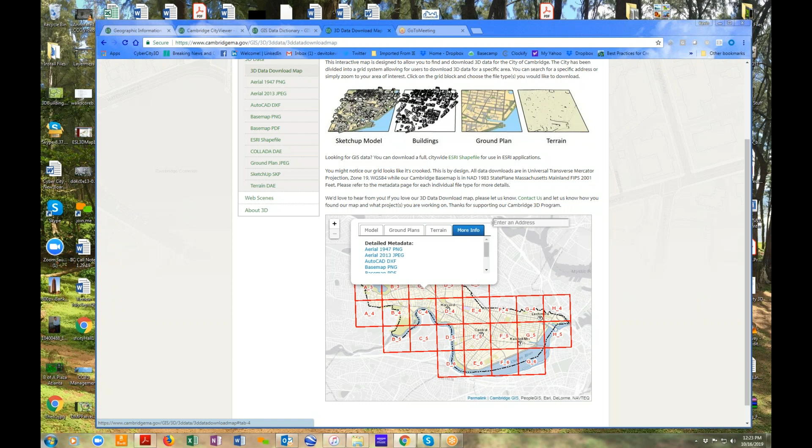I've got one correction on what Jeff said, and that is the ground plans are in JPEG or PDF or DXF, and the buildings are available as Collada. We're thinking about making the buildings available individually as KMZ files too. But yeah, that's about it - that's all I have to add.

Okay, thanks Paul. Sure, thanks Paul.

So just to let you know, Paul, Mark Thomas here. I've used the download tool and seen it. It's great, it was one of the better ones I've seen out there, definitely. Thank you.

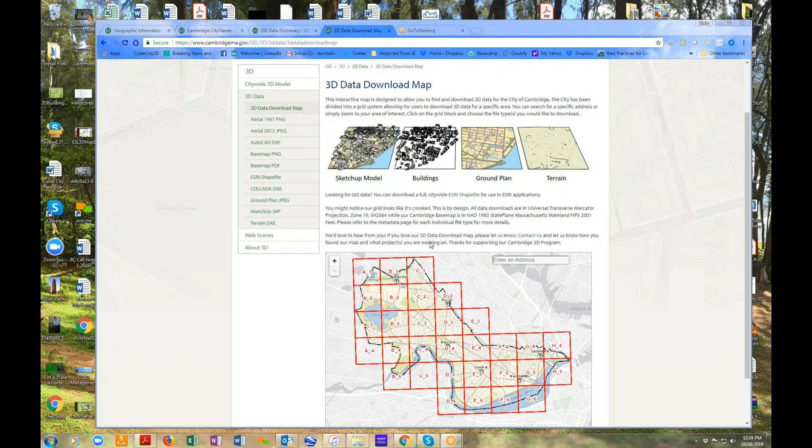So we're one step beyond the download tools, to try to get the architects and anybody else, the developer, to submit plans back to the city. That's part of our digital submission requirement. It's kind of out of what you're doing here, but that's the bigger picture: not only do we want people to be able to pull data down, we want to be able to get data back and bring them in.

Kevin is creating buildings and doing an update now of our buildings. We don't always have the data to create the building, so as a nice placeholder we get these as-builts. That's nothing new to the city, which also has a digital submission requirement for any infrastructure, water, stormwater, sewer lines, and we also have a requirement for plans. Really, they just get them in PDF format in our inspectional services. So anyway, we want to be able to exchange data back and forth.

One of the only downsides, I'd say, of the download link - not a bad thing - but before, when people were requesting data, we got a really good feel of who was asking for it. They'd have to call me, which is more work, so I'm not looking for more work, but it was nice knowing if somebody sent me an email and I could ask them a bit about what they're doing. So that's lost, because people just download it.

We look online and just see how much people are downloading. Once in a while they'll ask a question, but anyway, we'd love to have the back and forth with some of the developers. I think working with our planning department and the bigger architects we see time and time again, we'll start to open up some channels with them and talk about exchanging data and learn a bit more.

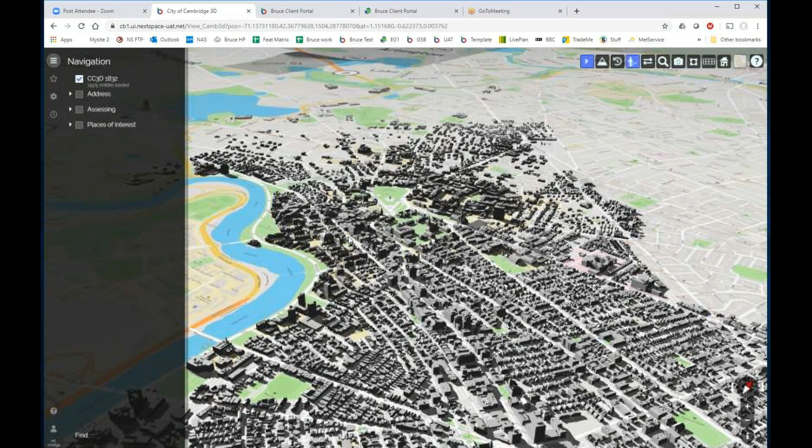So we send them around, we see them. I've also found in my work with Boston, which is a very similar system, that we've had some outreach with the Boston Society of Architects, and they've revealed that a lot of architecture firms have downloaded the entire model and are maintaining their own version in parallel. So, notification of updates is something they're interested in, as well as having individual buildings they can plug in instead of having to get large tiles to update when just one or two buildings have changed.

Well, that's interesting.

That's a conversation we've been having with a number of architects, around having this as a resource that they can collate across people within an office, and even across multiple offices. So the concept of federating and sharing is interesting. Do you want to contribute your data to the greater good, or do you want to keep it private? Some of those options are interesting. We can do it both ways, but it's an interesting conversation.

I don't have much more to say about the download tool, except that it's something that we know. We're looking forward to the data update coming from Kevin and incorporating that in. What we really want to do is have the data updated as much as we update our 2D data. For our 2D building footprints, we try to get them in as soon as we see construction happen. That can't happen with 3D, but we'd like to try to get some stuff in here.

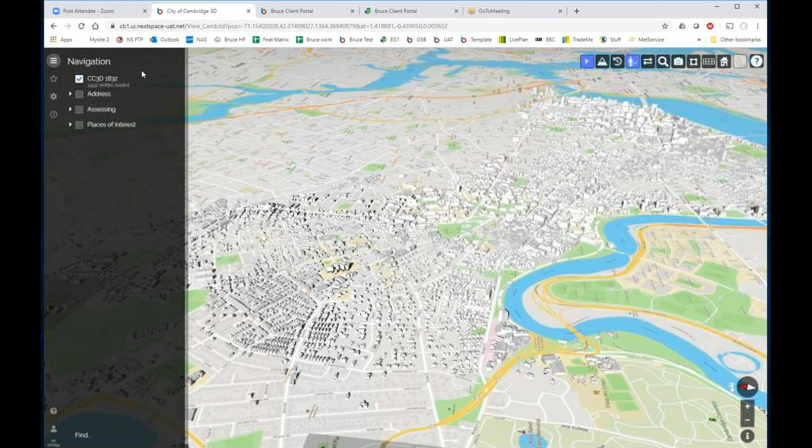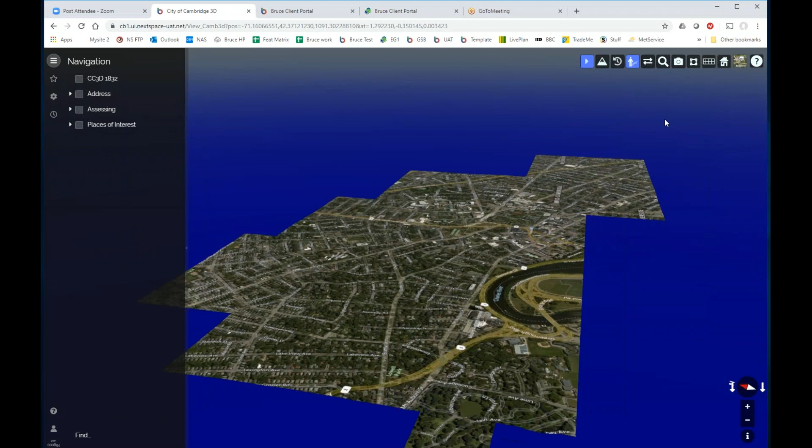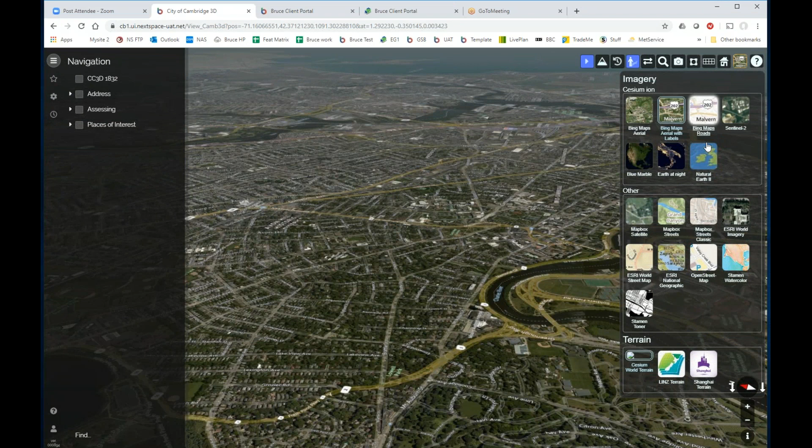But what I've got is the model of Cambridge. We can turn on, this is the place. We can choose base maps. You can choose a whole variety. You can have artistic maps. There's many different choices of base map that we can have, from that to... and we can add many new ones. So this list is one that can be as you like. So we'll just go for a nice simple background look.

Then we have the ability to introduce many different... we talked... layers is very much a GIS concept. We think more about entities, like things.

We have things, we have buildings, we have curbs, we have pipes, we have streets, we have people, we have modems, we have things, and we can put those things on layers. So we still support all the concepts of layers, but we think much more about things and their data, and about things and their relationship with each other.

A floor is in a building, a room is in a floor which is in a building, a building is on a parcel, and there are relationships. Like the building is contained by a parcel, a floor is inside a building, a room is inside a floor, therefore it's inside the building. And there are different data structures around each of those things, but there's lots of tools to bring it in.

So I'll just turn on the data here, and we've turned on a 3D model. We've got nice 3D models. You can do shadow analysis and all that sort of thing now, and we have tools for measurement and so forth, and markup.

We can make this pretty. You can use this basically as a 3D PowerPoint tool, so we can create a little story here of information. This is not done a lot here, but we can do some if that's of interest.

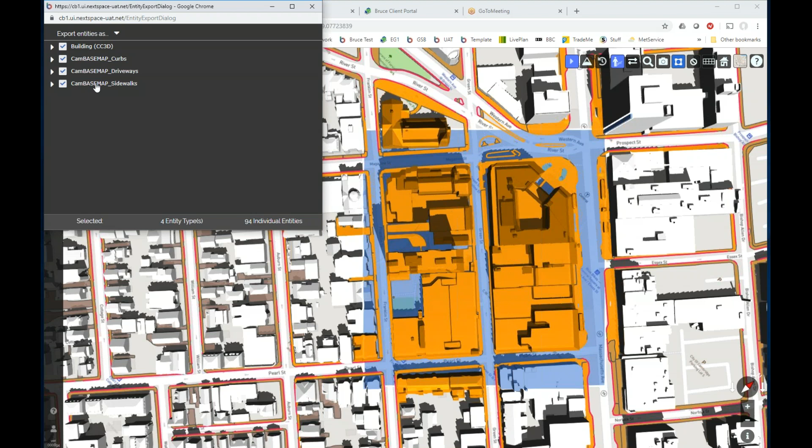And it says that it's found within our data set here what's turned on. It's found buildings, it's found curbs, it's found driveways, it's found sidewalks. And if we have a look, this is the list of buildings that it's found. This is a set of curb data that it's found. It'll tell us about those curbs and so forth, and the driveways and sidewalks that have been found in this.

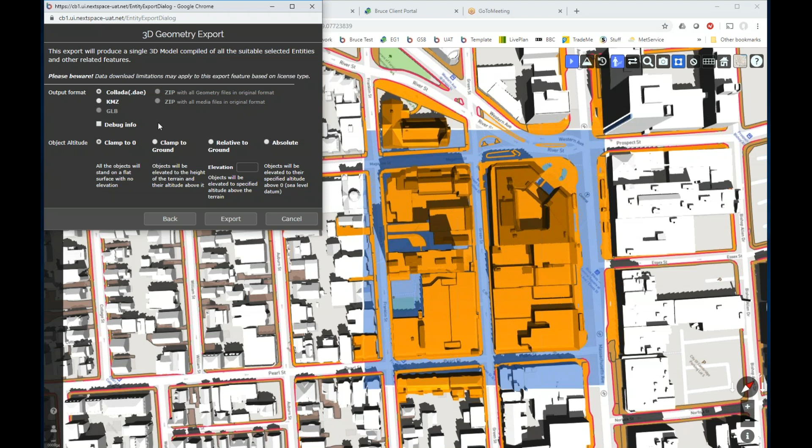So we're now going to go export, and we can export all of the 3D geometry as a combined file, and we have a choice of Collada, KMZ, and GLB. Just to be clear, a KMZ is a combination of a KML file for the 2D geometry plus DAE files for the 3D geometry. Now, this option's not currently working in this particular release, so I'll just bring it down as the Collada, but we can bring it down with the full geospatial. So really what a KMZ does is give you geospatial reference for all of the data.

The options there now include, now that we've done a geometry module, the ability to add numerous different formats here, from OBJ to Direct SketchUp to Rhino to, the way that we've done this module means the ability to extend to support multiple different formats is very straightforward now. We just happen to have chosen Collada at this point, but it will support all the entities. So any questions on that?

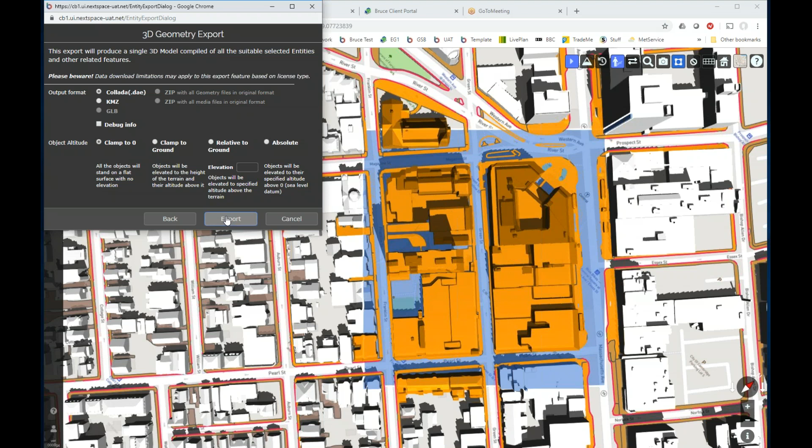No, great. Yes, sorry, I had a question. When you were creating, so you drew that box, but what if I want to add or remove? Can I add or remove buildings from that selection?

No, good question. Not on this particular version. No, you can't, it's missing. I should be able to go in and add a second selection or so forth. It's a more or less trivial piece of development for us to add that ability to add to the selection set. I'm sorry, it's just not quite done.

There's a number of things that are not quite complete yet, that we can add fairly easily, but no, as of today, you have to select it all, and I can close this, I can reselect the area if I like, or I could select again and simply add to the existing file, if that makes sense. But at this stage, no, it's just the area.

But I have another question too. Yeah, sure. Sorry, back in that window where you could see the list of everything that you had selected, yeah.

I saw there were check boxes there. Does that mean you can uncheck a feature? Yes. So does it show you which one you're unchecking on the actual map—does it highlight in some way? I'm not sure, I think so. If it doesn't, not a problem to add that. I think it does do it. Yeah, I saw the attributes.

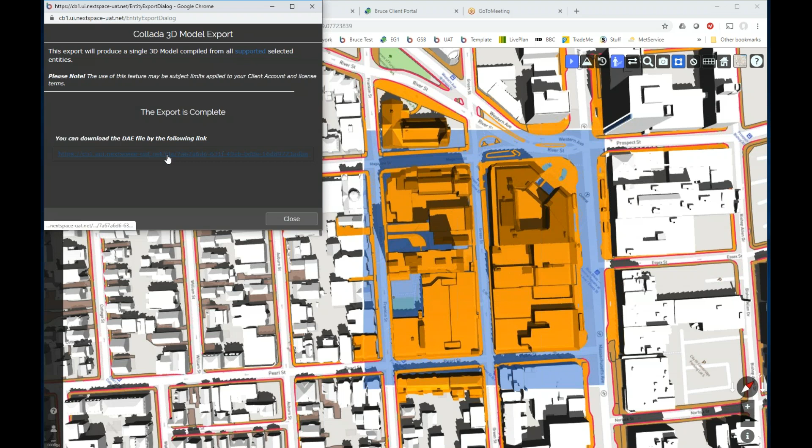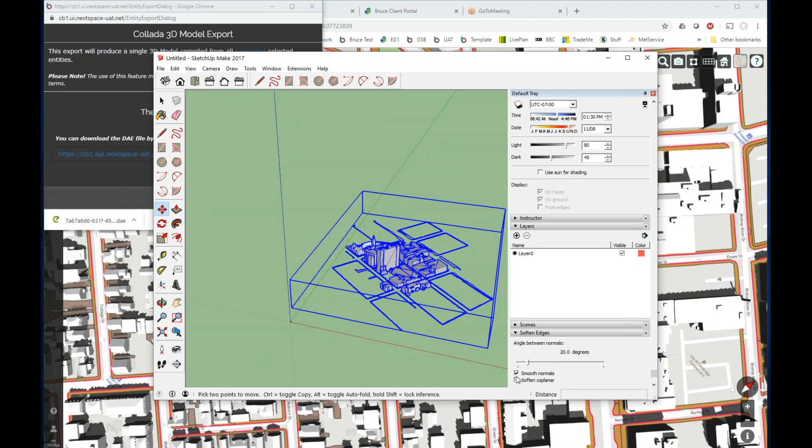This is Kevin here. I know Jeff and Katie and Paul and I have had numerous conversations about projects being done in Cambridge. One unique thing about this app is that because it's live and can be modified tremendously, you can bring in a development project, some area of high interest, and you can also download textured files and other types of building files and data. So if you want to feature a development project, you can upload the data, leave it there, make it downloadable, build a bookmark, and then promote the link and say, hey, you want to see this new development? It's right here—download it if you want to work with it.

Now, I don't know if that's a political minefield or how it's accepted and used—that's something you have to tell us. But I think it's really great if you want to pinpoint certain development projects that are in the works, in the pipeline, or being voted on or reviewed by the city. I think that's a great idea.

I don't know if our planning office does, but there's a giant complex that's going up right now called the Volpe Center—it's the U.S. Department of Transportation headquarters. They're actually building a new building behind it, and then that one's going to be taken down, so that's a real hot topic. I'd see people really wanting to play around with data in that area—it's called Kendall Square, our hot area. It's not too far from where Paul lives, and you can see some of these buildings from his house.

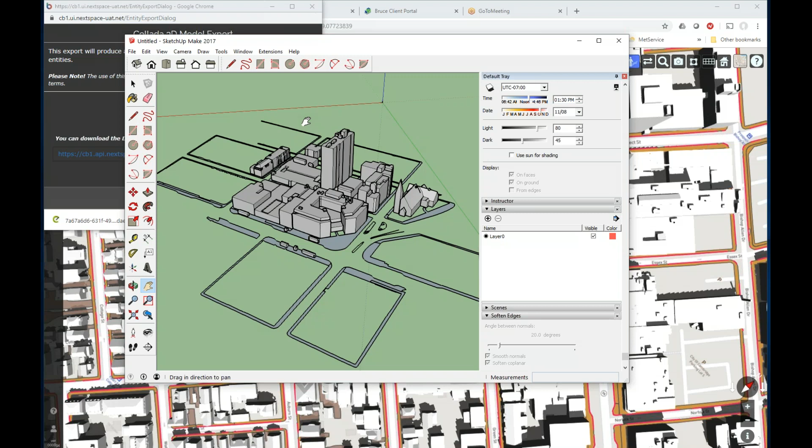It's very straightforward. I'll show you a demonstration of what it's like to drag and drop and put new buildings in. I hope you understand what I just showed—I just hit download and we loaded that model we created into SketchUp.

That's great. I have a suggestion that I know will be a feature for the future, maybe. As you can see, the curbs are a little complex, and capturing the entire ground plane with all its possible features is really tricky. But one thing I've found useful, which may be easy for you, is to just capture an image of your map service within the rectangle, and make that part of the Collada file as a textured rectangle—it really gets you a lot of detail for very little trouble.

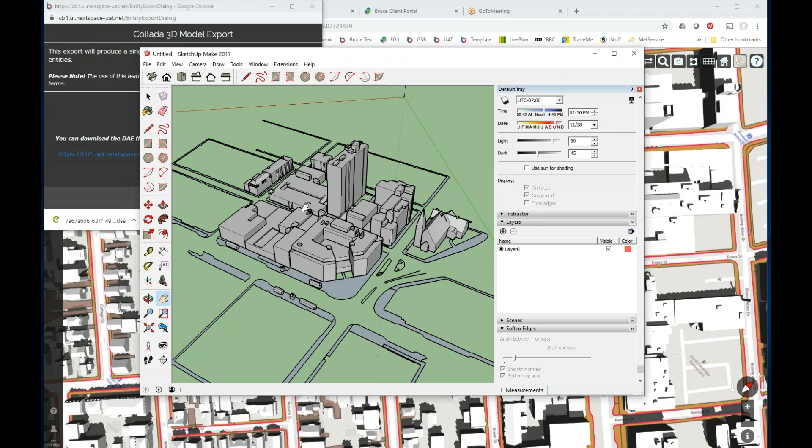Completely agree with you. Just to go back to this—at this stage, what I've done is we can turn on any GIS data that we've imported, and anything that I turn on will be optionally downloaded. The one thing I can't show you today is the download of the terrain or the base map.

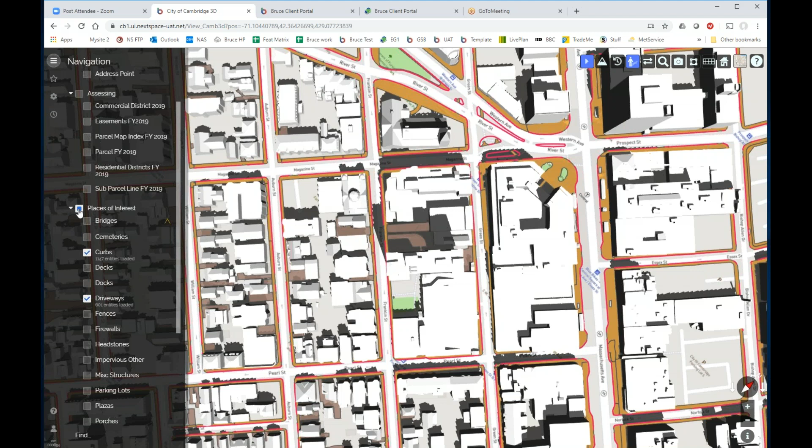So that's on our development roadmap for as soon as we can possibly do it, and that would include exactly what you described, which is either the flat terrain with the base map or the actual surface, the DTM model, with the texture map base map of choice. So if I turn the curbs and driveways off, we certainly wouldn't get those, we'll just get the 3D models. But ideally, we would also get whatever base map has been selected.

Yeah, that was a conversation we had a while ago, to try to bring in the base map, and then it got lost in there somewhere. But we have some cached base maps that we use, and it really is the same thing as what we call the ground plan, the JPEG and PDF that Paul pointed out.

Yes, absolutely, completely agree. So that's currently work in progress, to add that option for download to include the terrain and the base map.

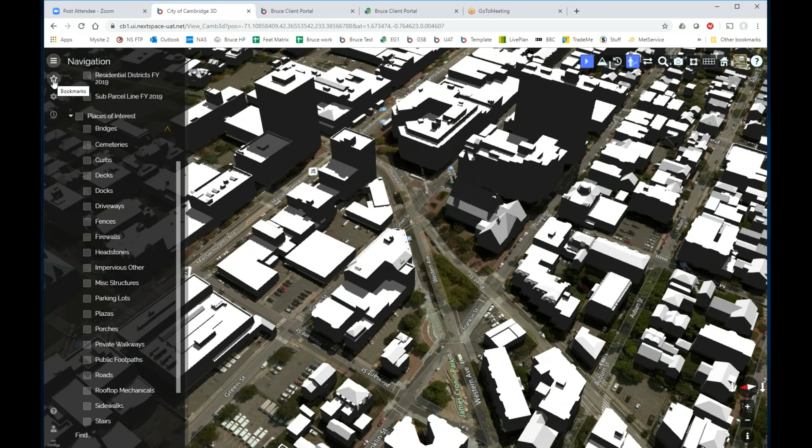And then this is simply a case of, you can either allow a free-form set, so you can decide from your account which things you want to allow people to download, and they can manually select them here, or you could limit it to a set of bookmarks which give them an overview which they can zoom into and pick out the things that, so if we click there, that's another bookmark of specifically 2D data, and there's multiple ways to cut it, basically.

Yeah, and also I think a really great application as we were developing this product - originally, when we started, we were looking at real estate, cities and architects, like how do we meet? And you kind of ebb and flow in terms of the requirements, but you're finding there's some overlap between the three different industries.

But one of the things I thought would be great for Cambridge, is that we can separate all the rooftops, and you can download rooftop data now, 3D rooftop data for solar. So if you're doing climate change projects or analysis, this could be great for universities to have access to the data, because they may just get their own license and upload the data and do their own projects. So there's a definite overlap with other fields like Department of Environment, Department of Transportation.

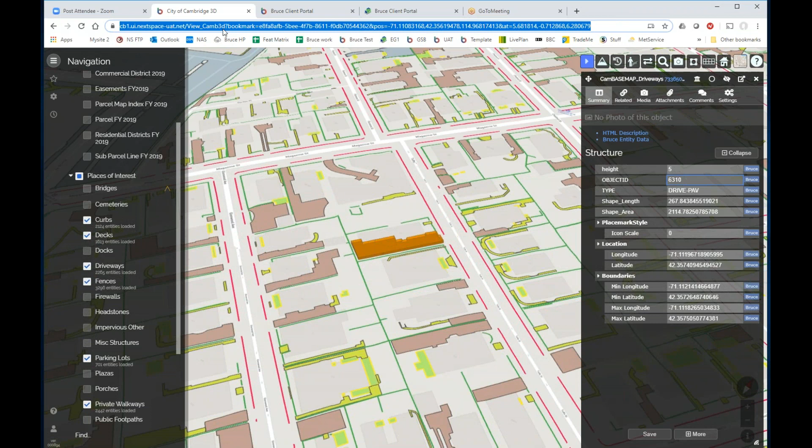Mark has probably shown you 10% of what the software does. So it's all there. Would you like to see a bit more of what it can actually do outside of the specific download?

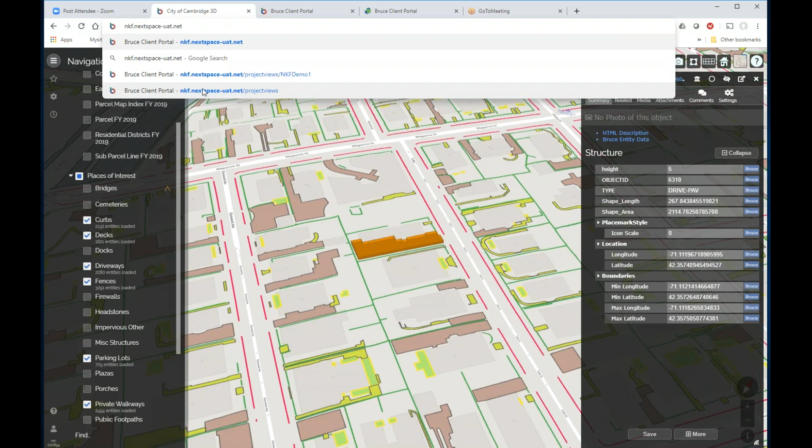Sure, yeah, sure. Okay, there was one thing, I'm trying to remember who sent this to me, but somebody from EdgyGeo, it was kind of like a latest developments PDF, and one of the things that we have a hard time with in the Esri world is the 3D markups of the leaders that you guys had, and you said that the slide was like they stay attached while the model is rotated, and text boxes, leader arrows, and everything. That is something that we're always fussing with.

Okay, alright, well, and that's a real estate - that's a big real estate ask, Jeff. Right? Like that was the requirement of the graphics departments in the real estate office. Like, okay, we need 3D, we need to mark it up, it needs to be better than Google Earth, it needs to be easier and more flexible than Esri, blah blah blah. Right? So we definitely heard it from the specialists in those industries.

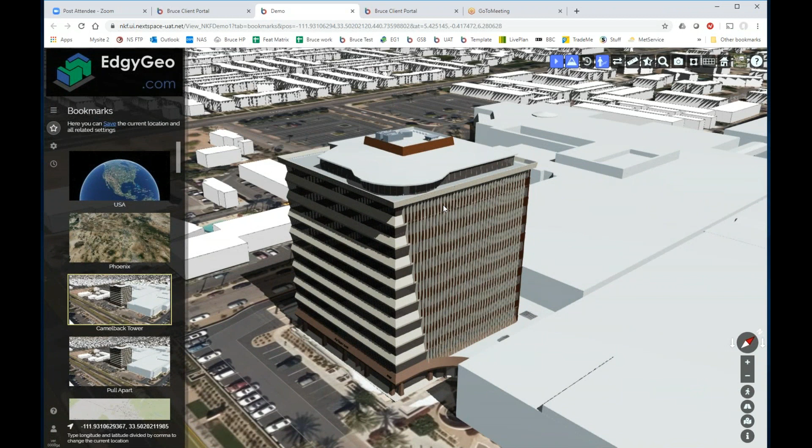So I'll walk through this. This is in no particular order of features, but the idea is that we can bring in - these are examples of the 2D extruded models mixed with 3D models mixed with textured models that have been brought in here. So you literally just drag and drop your 3D CAD models, converted to a thing called GLB, which we can explain more. But when we put them in, you have complete control over moving it.

So the object here, when I click on it, we've got custom forms now, which mean you can pop up, you can design exactly what you want to display. So this is just a subset of the data about this building, with the full data available based on login here, with media attachments, and we can look at multiple photos, plans, and so forth, multiple documents. There might be PDF documents about the building attached - just download that, and we'll see a PDF pop up.

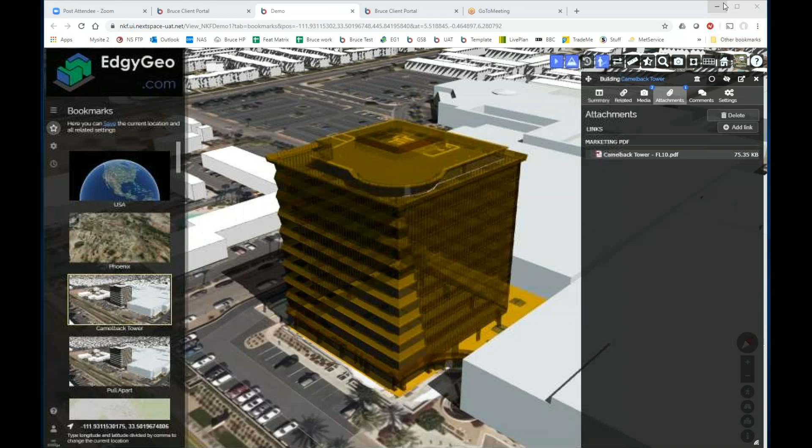So all of this data becomes available. We can also, in settings, move it about and adjust its position. I can literally move this building around in here—we'll just cancel that and put it back where it's supposed to be.

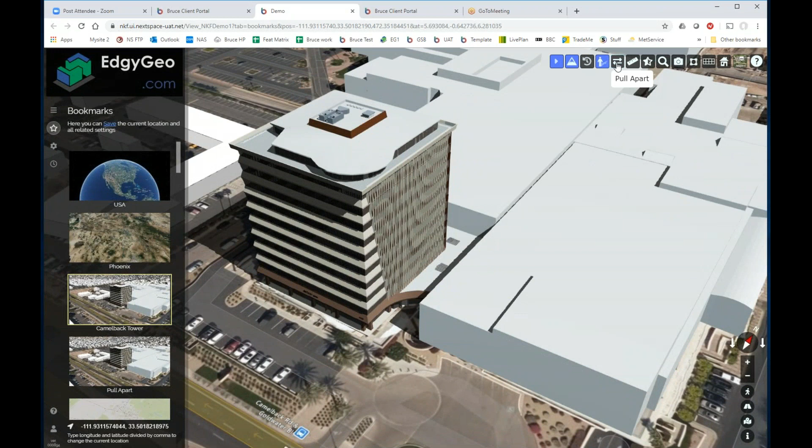You can also go in and pull apart just some parts of it. So we could go in here and just pull the floor out to take a look at it, and then put that back in there.

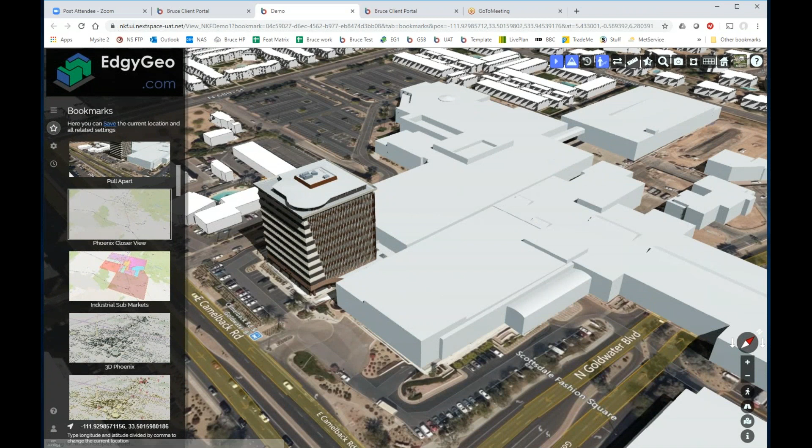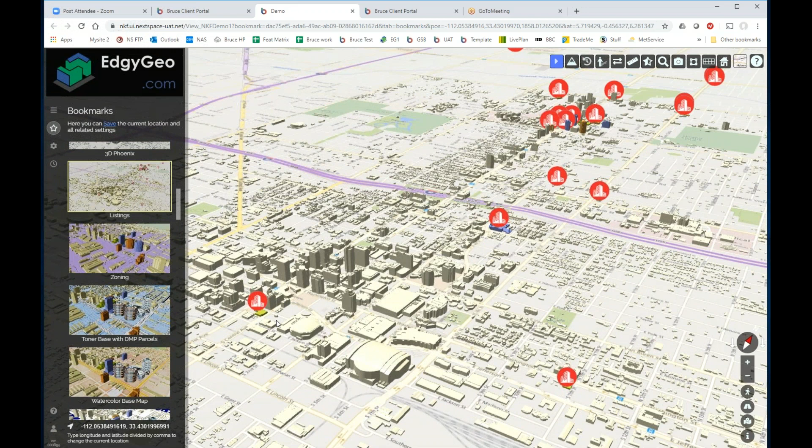We've got tools now where we can search, find all buildings in this zone on this type of parcel, and then zoom up and it'll show you the buildings. If we click on that, we get a little summary with the overall space and so on. There's no photo on that one, but some data is there, and the buildings are actually colored by the class of building.

So you can choose to colorize the buildings in any bookmark in any way you wish. These buildings are class A—if I change that to class B or C, it'll change color.

A mixture of texture, different base maps and so forth. We've got a tool here which will capture this image—there's zoning information too—and it'll capture this out to up to 600 DPI and higher print resolution.

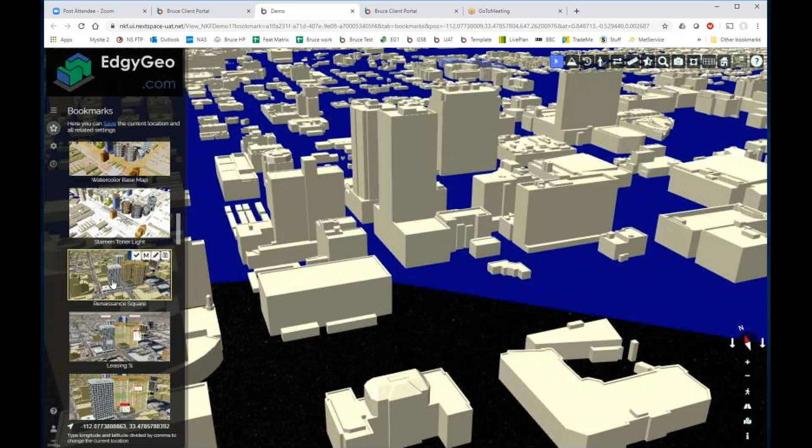If you wish, let's go down to Renaissance Square—this is the general one. We'll come in here, add legends, and these are the markups.

We'll add a couple of extra. You can have little animated files, and you can see how the leaders move around and follow the objects as we go.

We can turn markup on and off, so these are associated with the bookmark. We've got measurement tools, and we can go and walk around. So what we might do, let's see.

Shadows, yeah. So one of the other things in that same document, the PDF I was looking at, was search tools, coming soon—searching across all entities, attributes, and spatial position, and displaying the results. I know you said it was coming soon, but I was curious what you're thinking on that.

So for buildings, add criteria—we're interested in the agent name includes Newmark. Add a criterion, show, hide, add a criterion. We're looking for a certain amount of space, available space direct, something like that, greater than or equal to 5,000.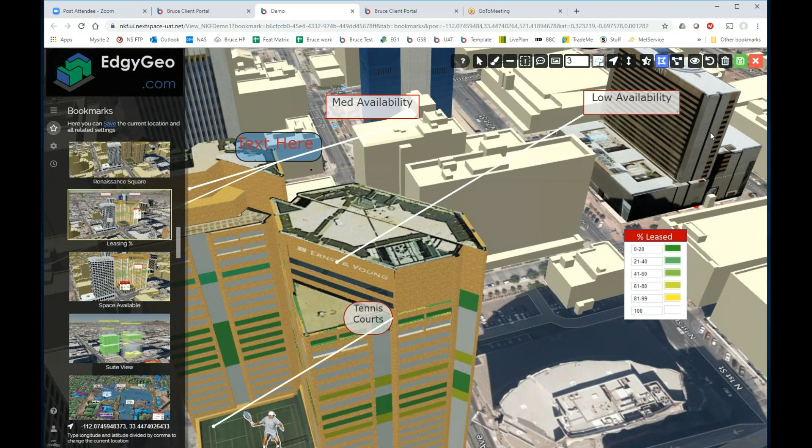I wanted to see what it looked like when you kind of rotated or zoomed around. Are those labels fixed? Yeah, they're fixed in 3D space.

This is another amazing feature. All this markup was designed so you could create content, right? You can create graphical content from 3D, and also present it in 3D, but also improve your ability to create reports, materials, and so on.

We also bring in third-party data like walk scores, traffic data, and that's all live, including Street View and the things you would expect, Matterport and all that as well has been integrated. All the things you need to sell commercial real estate, basically, which is a lot of bells and whistles.

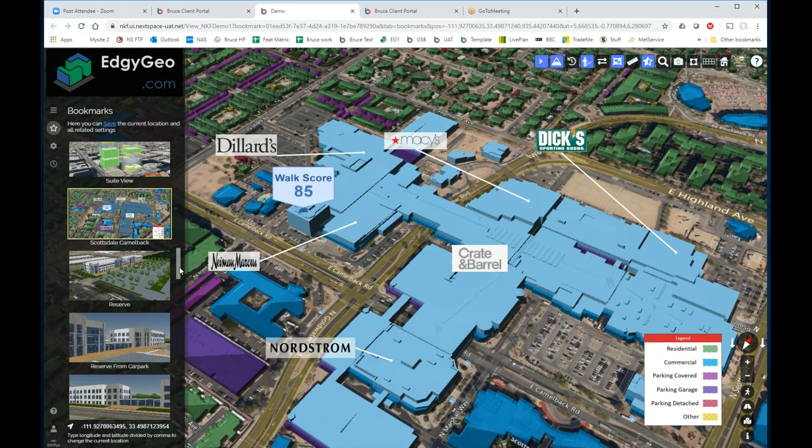I think the walk score and the other live data would be really valuable to the city, because there's a lot of really public good type of information available, in terms of fed services, not just walk score, but also environmental scores, things that relate to public transportation advantages, and so on. It's great because you can show it all in 3D, and add it to the app as another feature for the public, or do it internally for reports.

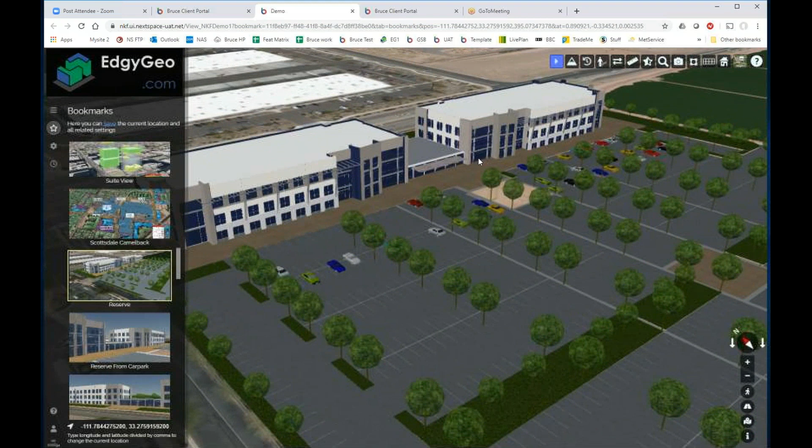Also add information about... let's have a look here. The Matterport link is what people go to, so we can link off to actually go through. We've got 3D scans of the building.

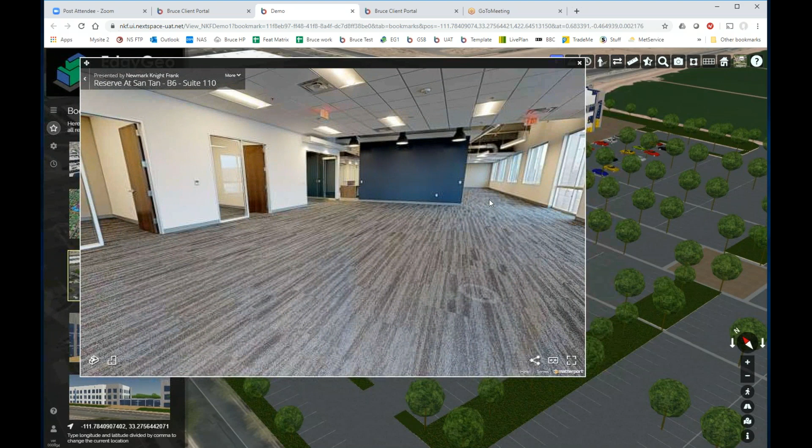We can come in and hey, Paul, I think Parvane is doing all this for Harvard now, right? Did she have you assist her in some of this interior work she's doing at Harvard? No, I haven't heard about that, but I'm not surprised.

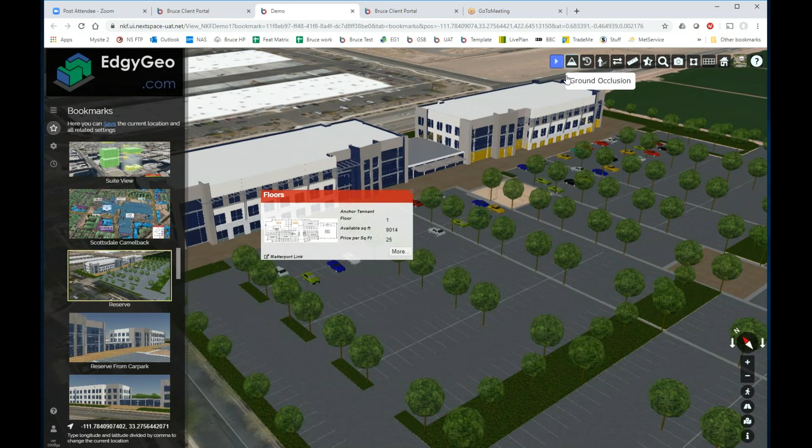Someone in management said we need interior GIS, so she's been working with Esri to do some stuff, but it's all been kind of hard labor stuff, right? Very custom designed. It's not really like EdgyGeo where you can just build it and bring it in.

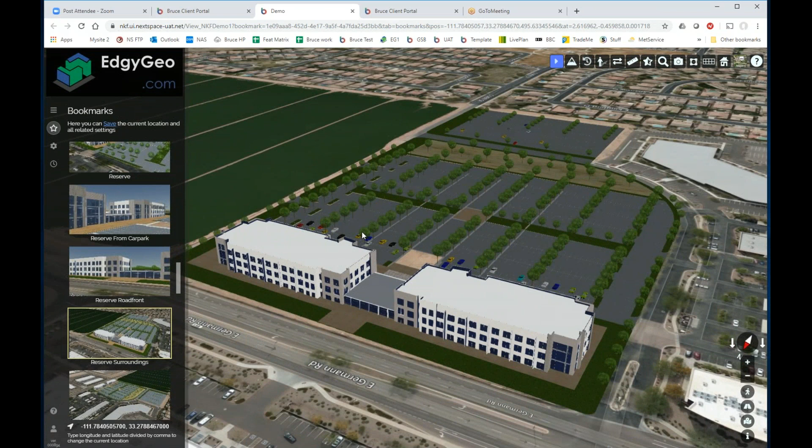Of course, the challenge is always the 3D models, right? That's always the big thing, to get the 3D models, but also to get them to work the right way is important. So a lot of these features are really all about the upload, download, and easy visualization so that the data can be consumed. That's really the major purpose of this discussion, but there's all these other features.

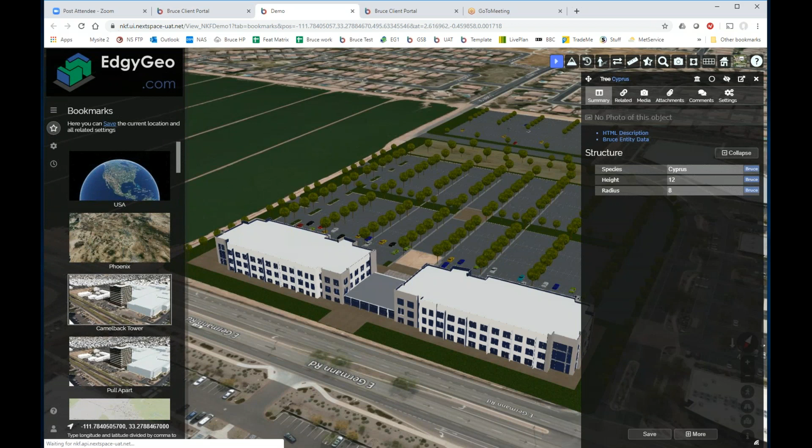So what I'd like to do, Paul, is have you get a little involved and take a look at this, and find a way that we can even turbocharge this more.

Here's some other examples. These entities are traffic, so the actual traffic information is coloring and sizing the lines on the map based on the actual data about the traffic. So if we go and have a look at the menu about this...

Let's see, demo, that's it, yes. So if I go to the menu, we look at the menu system that was set up for that, and we look at traffic, we'll see that the style for the polygon - it's not traffic, it's project view, polylines, there we are.

So the polylines are set so the line color is a gradient based on the values of the range, and the line width has 7 mappings, and the applied value is 2. Now we could increase those - double all those, for I'm meaning to do that sometime - 6, 8, for the thickness of the roads, 10, 12, 14, 18, and close, and save that.

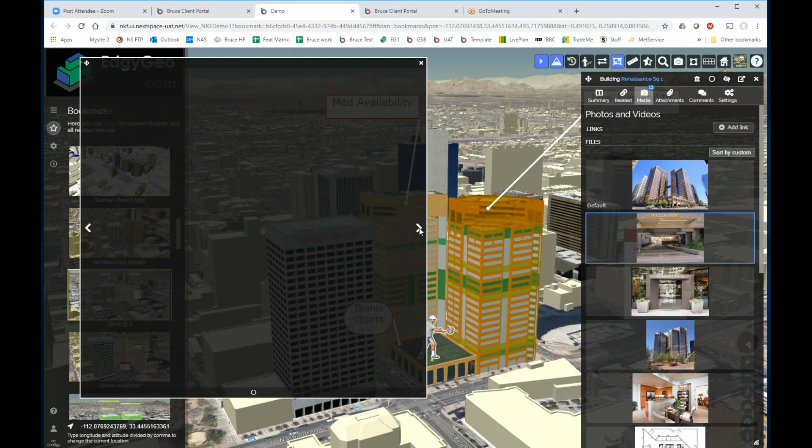So we're now looking at information about that building, and it tells me, as well as having lots of media that I can look at, we can go through a little media tour of the building.

And so this data is associated, and the way that this media is associated is to simply drag and drop data into this view. I literally drag and drop an image, again if I have the appropriate login, and that creates a set of videos or images.

Likewise, attachments are really the same thing. If I want to drag and drop documents, consenting information, resource consent documents, city planning documents, anything you like essentially, it will create classes and types of documents as you upload it. Say, what is this, a consenting document? Is it a planning document? Is it public information, a legal document, a title document? So all of that can be added.

But what we're talking about here is the building. So the building itself is a thing. We also have related to that building multiple floors.

So, for example, if I go to floor 17, it's a relationship. So I go to floor 17, I'm now no longer looking at the building. I'm looking, like, my information is about the floor, if that makes sense. And so in related, the floor is inside this building, and the floor contains these suites.

So when I click on the suite, you should be seeing the information. I've got a little hiccup there, excuse me, but I would go into the suite, and that would give me the floors and the suite information. If for some reason there's a link missing, that would take me into the data about the suite.

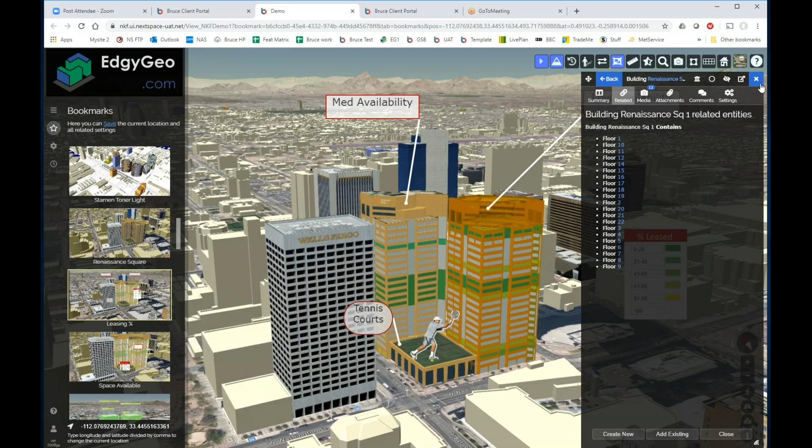This is brilliant, by the way. I love this. How does a person create this data? We're looking at a 3D building, and it appears to have a bunch of spaces inside of it which fit within the building, maybe just extruded polygons or something like that, and they all fit together nicely. Do you have in mind an authoring tool for actually creating this kind of geometry?

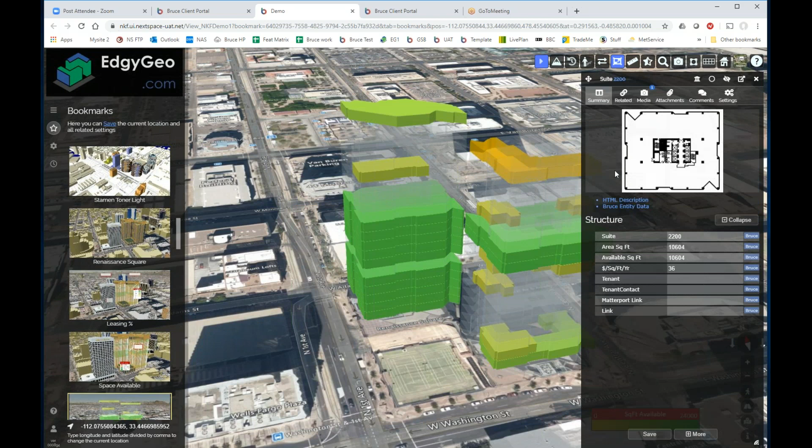Yes, we do. At the moment, it requires that we create this geometry. So here are the suites in here, and I'll have to look into why that relationship looks broken. But if I look at this suite information here, these are all related, so it's related to floor 22. Yes, there's a link issue. My apologies, it happens in demos and then you find something.

But these models here are created using SketchUp. The idea is for us to have an authoring tool, again it's on our roadmap, so that when we go to any building we can extract it into a temporary tool which will allow very quick subdivision by floor. So you type in the number of floors and then subdivide a floor into partitions like this, so we can very quickly create these three-dimensional spaces.

And these spaces are not just geometry, as you can see, but they're actually data. They are entities, of an entity type suite, if we define it as a suite or a space, and they're connected to an entity type which is a floor, which is connected to an entity type which is a building. So when we see in here, let's go to entity types, we have defined a building.

So I'm looking at having all of these different potential attributes in this particular case, and we can add and subtract to this list of attributes anytime. We can edit and so forth.

If we go back to a floor and look at the data schema for a floor, we'll see that this is the data that we have for a floor, and we can have the Matterport link, and I can add any new attribute type to it. So I can build a universal concept of a floor and link it to multiple different data sources about a floor.

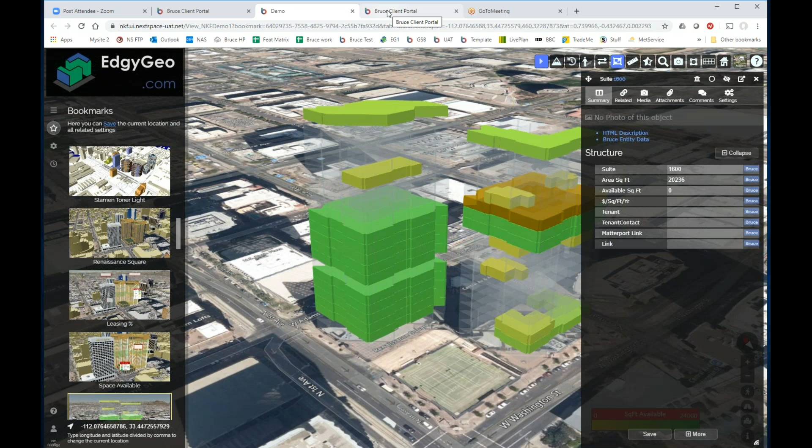So currently, like with this particular example building, you've created all these interior spaces with SketchUp, and they become objects and exported out somehow, and then the manager clicks on each of these polygons and attaches the attributes to them using an interface of some sort that uses an ID and some sort of relational link to link each one of them to a table of suite data?

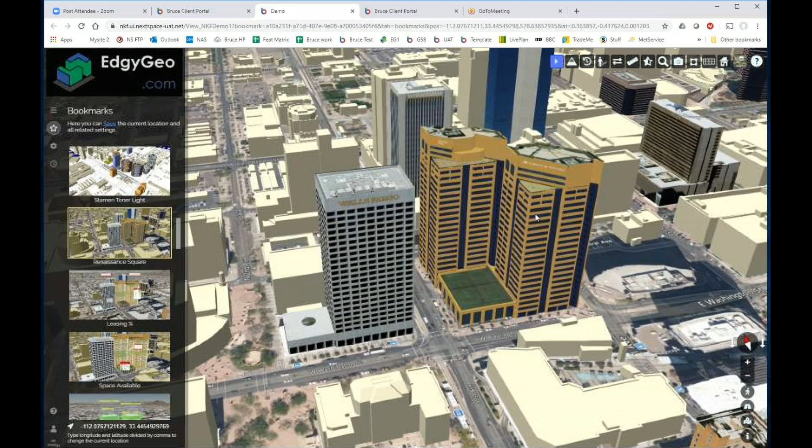Yes, we have a number of ways to do that, either manually or programmatically. So in the simple sense, what I did here in creating these particular relationships is we turned on, let's go to a fuller view, and I could say, for example, and we pick this building, and we go more and relate it, and then I can go create a new entity on the fly, or I can add an existing. So I might, well let's do this, this would be interesting.

Okay, I can't do that one there, I'm not allowed to do it with that. So if I select a building, the idea is I can add an existing, in which case I can then select if I have an entity I'm allowed to do that with. I select with a window all of the objects contained within the building, or one by one, or shift select, and I say add a relationship, and in that sense I can then define a new relationship or use an existing relationship. So I might select the building, and then I'll go add existing. I put a window around it, and it selects all the entities that it can find in there.

You then say, well, I'm only interested in those ones. Build me a relationship which says that the entities selected are related to the first selection by this relationship, and I do it. Now, anything that we do here, we can also do programmatically.

For example, it's feasible to build the relationship between objects based on a spatial search or a data search or join. So I could say all of the buildings that reside inside the polygon of a parcel, I want to create the relationship 'is inside.' So for all buildings found on this parcel, build the relationship: this building is inside this parcel.

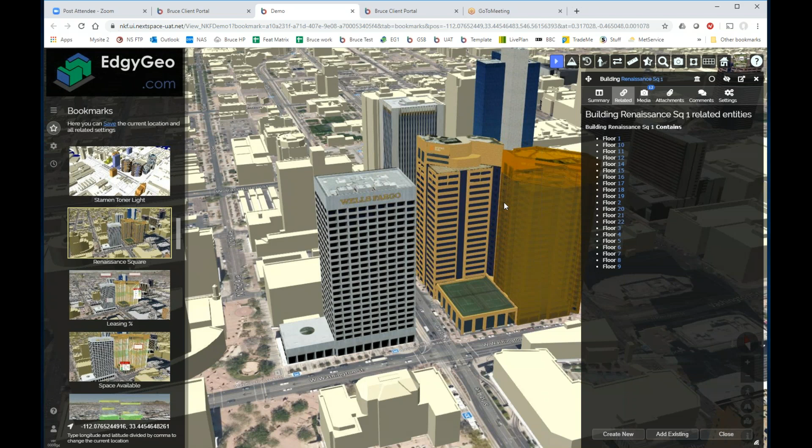Yes, yeah, yeah. So the other question I had about, you know, what about something underneath the building? Like if we were going to do a relationship, I'm thinking of zoning. You know, there's a zone. Could you do something? I know this is building centric, but you know.

Yes, absolutely. In fact, here we are. Here's one in zoning. So I have these zoning polygons here. For some reason, I'm not showing this account, but let's select that zone and see if we can do a relationship.

So that zone, add an existing... I'm sorry, for some reason in this account, I'm locked out of doing the relationships. My apologies. Happy to show this when it's working properly.

Basically what I do is go to the data about that zone, and say add an existing relationship, choose single entity, and click on that building or a selected area. It then builds a relationship, and the relationship in this case is associated, contains, or inside. I can have a new one, connected to, or something like that, and choose that relationship. That's how I build it on a one-by-one basis.

But I might want to do this automatically for all buildings, and say for all entity types of building, build a relationship by nearest polygon, i.e. for each zone or parcel, find me the building, the Cyber City building that is contained within that, and build a relationship. Does that make sense?

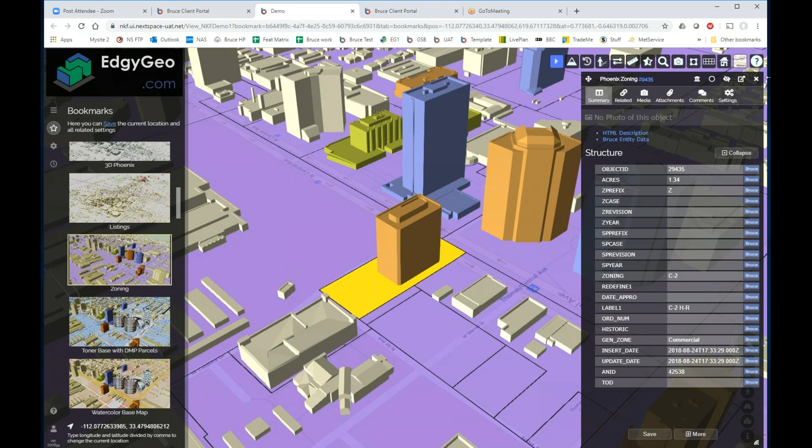But I can show you the concept. I mean, if you'd like to see pipe networks, this is mock-up stuff.

Well, we've got to wrap up fairly soon because I don't think I have this conference room reserved much longer. But...

This is good. I like the download tool - it looks great. There's a whole bunch of new things here since the last time we sat down and talked.

We're really looking forward to getting our new data set together, and we're thinking of ways that we can get it out there. So this is food for thought here. I certainly, like to encourage...

I don't want to distract things by showing lots of features. I think we just want to work on getting each step exactly right for you, so that we move forward. We have an engagement: we create the download tool for buildings, and then we add the download tool which will include terrains, and so forth. Let's do it a step at a time and get each part exactly right in the way that you want it.

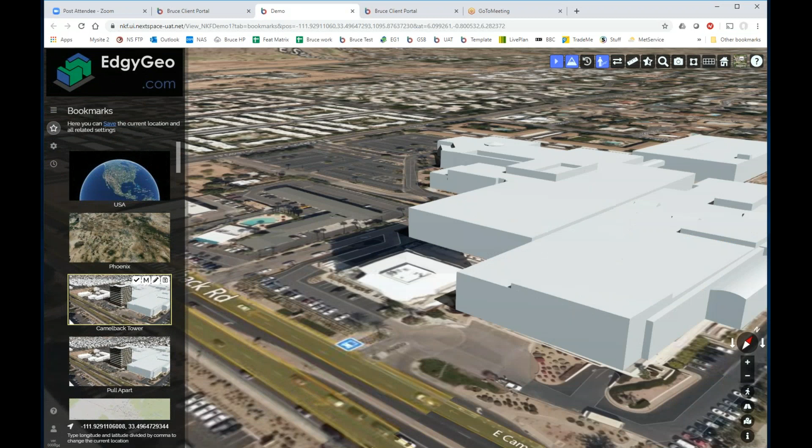Yeah, good. That sounds good. So we want to talk amongst my team here, and then I've been talking to Kevin about this as we're moving forward, he knows a little bit about what I'm trying to do. This is a great overview, thanks for the time showing us the new tools, and the download tool looks great. I think there's a lot going on here.

You guys are juggling a lot of balls as you put this thing out. So we've shown you a few beta features, but let's get the download right for you and go from there. Absolutely.

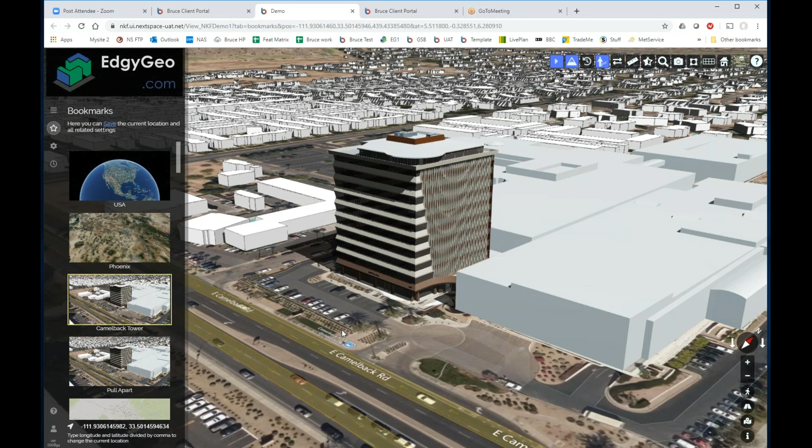That's great, let me know how it goes. Let me know if there's any new insights in terms of how we can bring 3D to the world and have a great time. Yeah, Katie's bringing 3D to the world, she's going to be doing a presentation on 3D.

Yeah, exactly, awesome. I taught a class in, what was it for, Nashville? Jefferson University in Philadelphia. Oh great. A 3-hour-long lecture about Cambridge and 3D and what we're doing here. Wow, look, if there's anything we can do to support you, give you login and some help, let us know, we'd be delighted to help you show off 3D Cambridge.

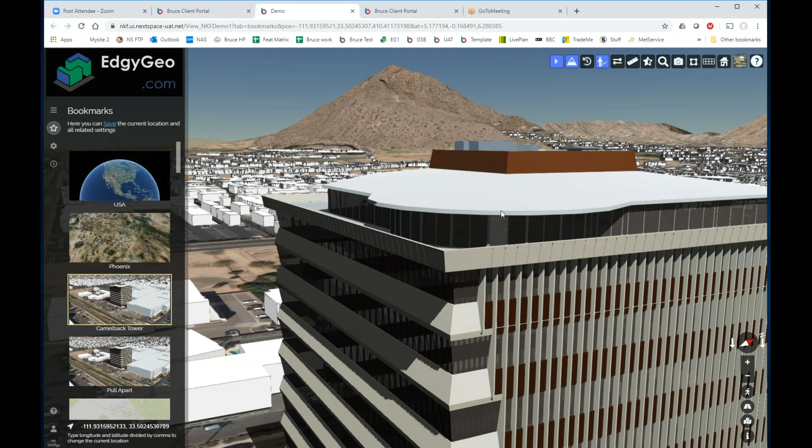Okay, talk soon. Congratulations, Mark, this looks really great, lots of work. It's paying off. Thank you. Thanks to feedback from our business relationships and our friends, we were able to build this. Yeah, terrific. So, okay, thanks. We're gonna go through it, and maybe get some more feedback and some ideas, but you're heading in the right direction, I'll tell you that.

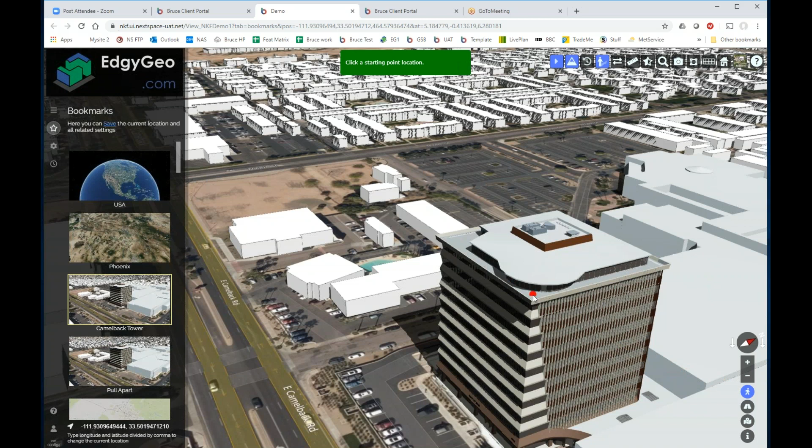I forgot to show you something really quickly on the way out. We got the new walkthrough mode, so you can actually go and stand anywhere and play it like a game. Cool. Oh yeah, what did I see? I saw that somewhere, or maybe it was a different email that came through. New walk fly modes. Yeah.

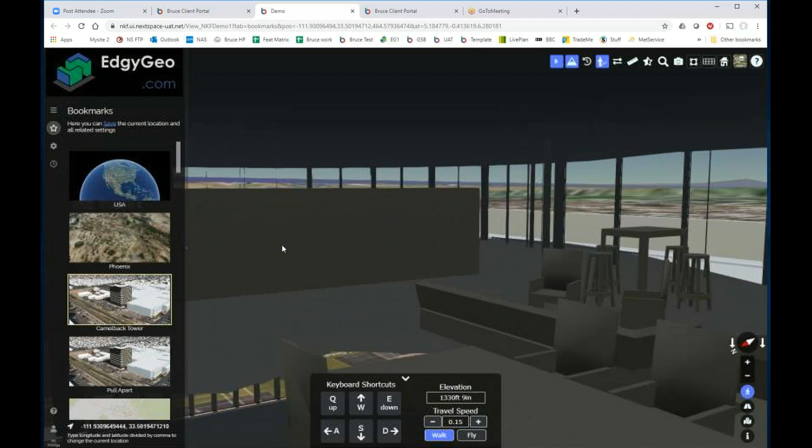Okay, and that can jump to any point. That's cool, yeah, very cool. There's another project that Katie's working on, which is more outside of the buildings. We're doing this along a corridor, a transportation corridor that's a proposed walkway. So we're doing some things that are outside of buildings too, and we have some interested internal clients, people from our planning department, but that's a project they see that they want to do something public facing on our website for. So yeah, sure, that fly mode, we can do things potentially like fly along polygons and paths and all that sort of thing. So please talk to us about it.

Yeah, there's a Camelback Mountain. It looks like. Yeah, it is, it is. And those are extruded buildings, they're not as pretty as the Cyber City, but at least we get full coverage. Yeah, and you got there, I think I showed you, we got the street view and map views integrated, so it's all part of the system now.

Hey Paul, are you still in the Google Street View image? No, they updated it, they took me out. My 15 minutes of fame is finished, I'm afraid. Oh man, too bad. Well, there was somebody from MIT that said they figured out a way to get historical street view imagery, so maybe we can bring it back. I believe it, good, I believe it.